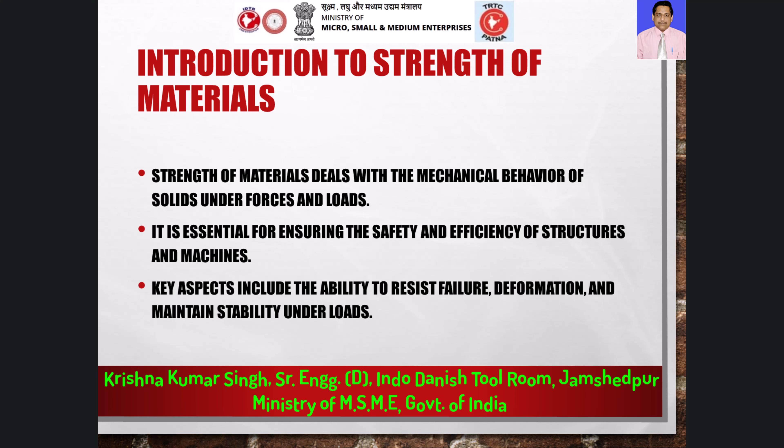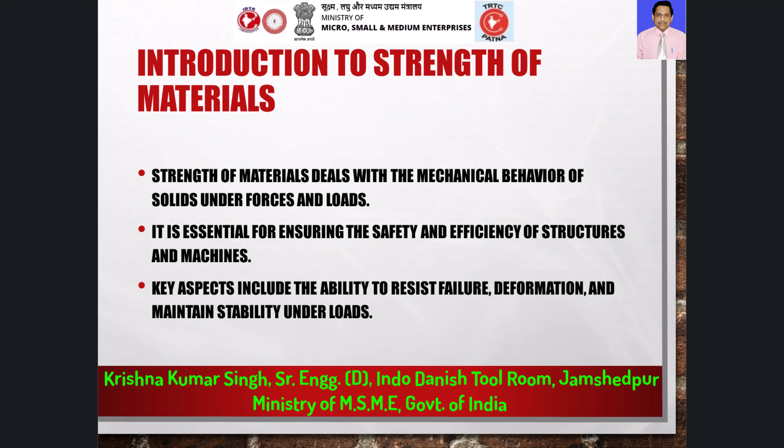Now, when we talk about strength of materials, we are referring to a branch of applied mechanics that specifically focuses on the mechanical behavior of deformable solids under external loads. This includes various structural components such as beams, columns, plates, and shafts, key elements in everything from buildings to bridges and machines. In engineering, understanding how these materials behave under different conditions is essential to ensuring the safety and longevity of our designs. Key concepts and requirements.

1. Strength. The most basic requirement of any structural component is strength. This means that each and every component must be able to resist the forces it is subjected to during service. In simple terms, the material should not fail or break under normal working conditions. Whether you're designing a beam for a bridge or a shaft for a machine, ensuring adequate strength is fundamental.

2. Stiffness. Now, strength alone is not enough. The material must also possess adequate stiffness. Stiffness refers to the ability of a material to resist deformation, essentially how much it changes shape or size under a load. For example, if two components are meant to fit together perfectly, any excessive deformation could lead to a mismatch, causing functional problems. Interestingly, a material can be strong but not necessarily stiff. This is why both properties must be considered during design.

3. Toughness. Next, some materials must withstand dynamic loads, forces that change rapidly or come in short bursts. For these situations, materials must have toughness, or the ability to absorb energy without damage. Toughness is essentially a balance between strength and ductility, particularly under dynamic or impact loads.

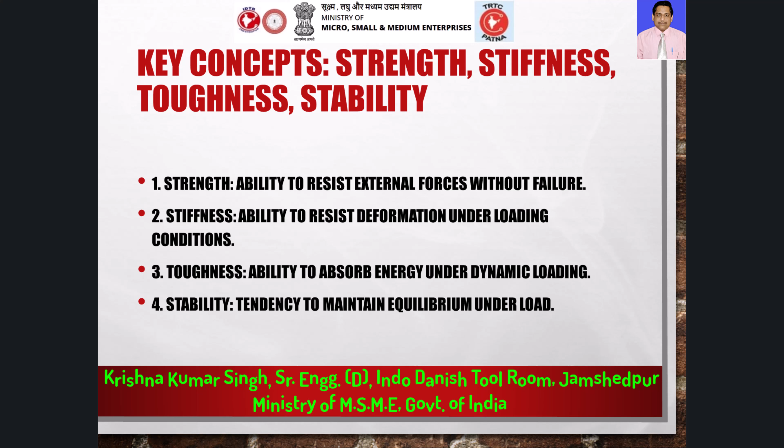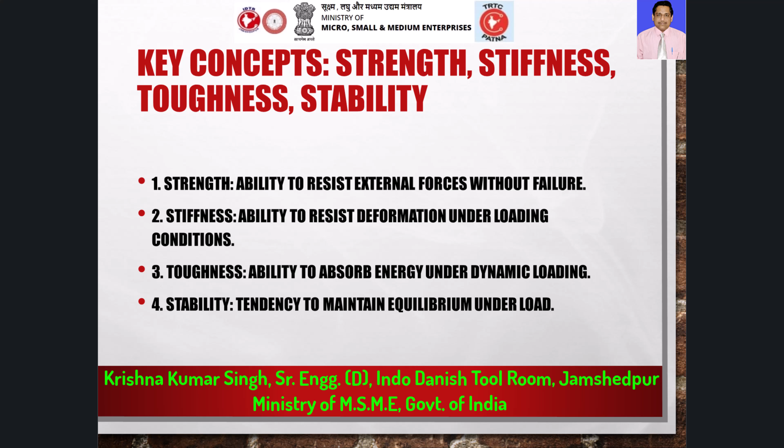4. Stability. Finally, we come to stability. Stability refers to a material or structure's ability to maintain its shape and equilibrium under load. Lack of stability can lead to sudden, catastrophic failure. For example, imagine a long column under compressive force. If it lacks stability, it may buckle and collapse even if the material is strong and stiff. Ensuring stability is key to avoiding these kinds of failures.

Generalized procedure for analyzing strength of materials. In mechanics of solids, analyzing a system typically follows a structured approach. Let's break this down. Step 1: Setting up an idealized model.

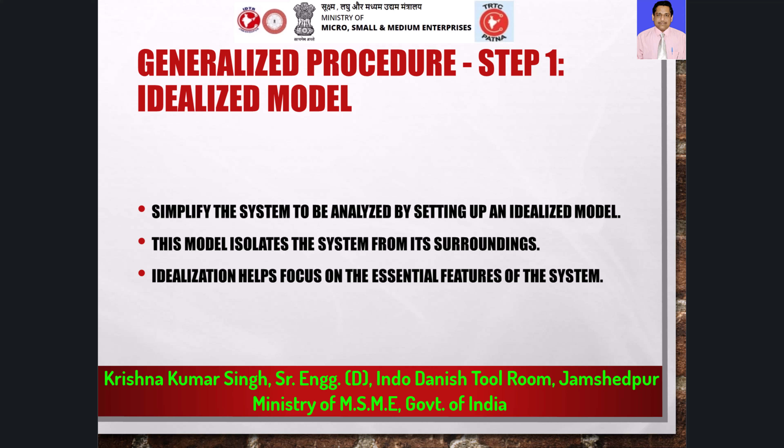First, we begin by simplifying the system of interest. The real-world object, a machine, a beam, or any structural component, is isolated from its surroundings, and we create an idealized version of it. This simplification helps make the system easier to analyze while still capturing the essential physical behaviors. For example, instead of analyzing every microscopic detail, we might approximate the system using basic geometric shapes like rods or plates.

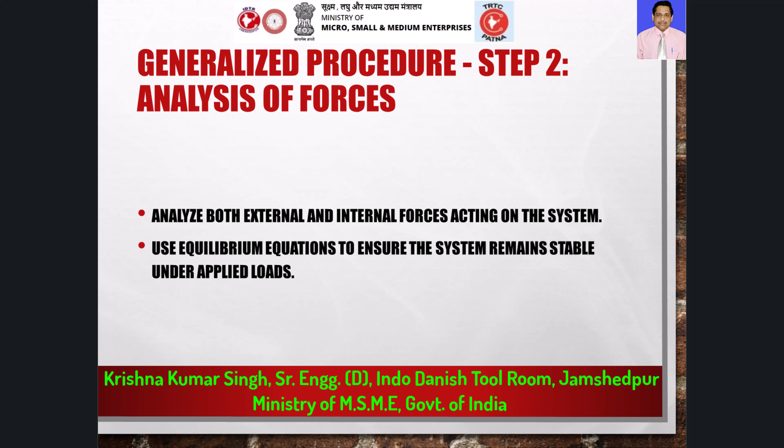Step 2: Analysis of forces. Next, we analyze the forces acting on the system. These could be external forces, such as gravity, wind, or loads applied to the structure, or internal forces, which resist these external forces. It's essential to understand how the forces are distributed throughout the system, and we apply equilibrium equations to ensure that the system remains stable under the applied loads.

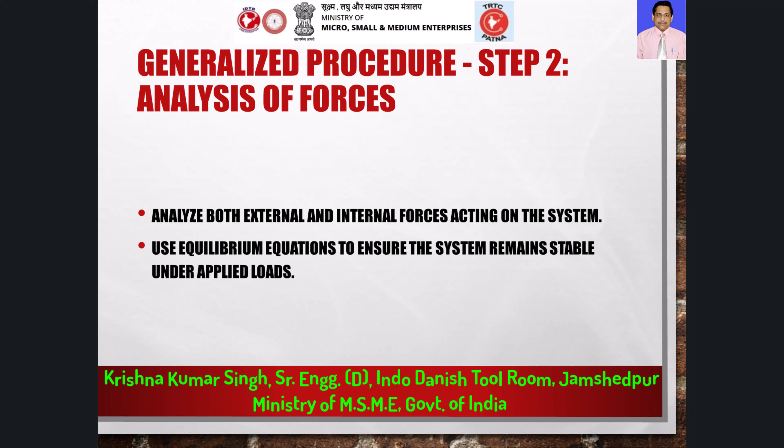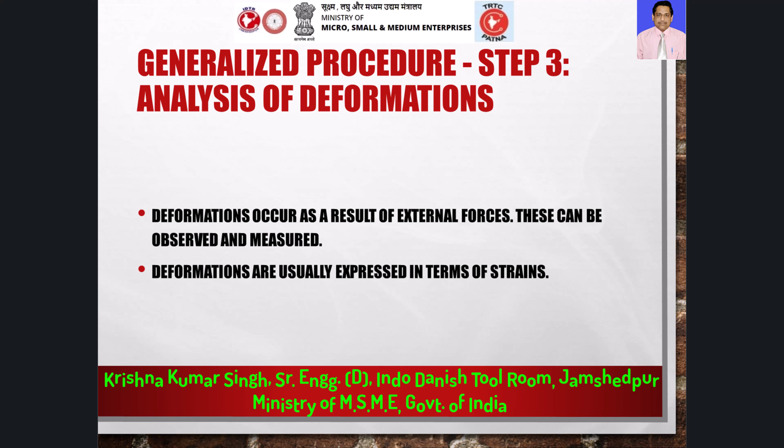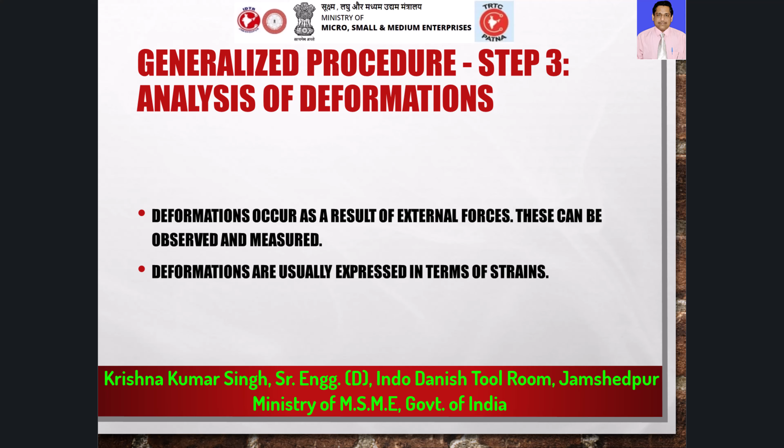Step 3: Analysis of deformations. Now let's talk about deformations. Deformation occurs when external forces cause a material to change shape or size. This can be measured and observed, and it's often expressed in terms of strain, a measure of how much the material has deformed relative to its original shape. In most cases, we'll focus on elastic deformation, which means that the material returns to its original shape once the load is removed.

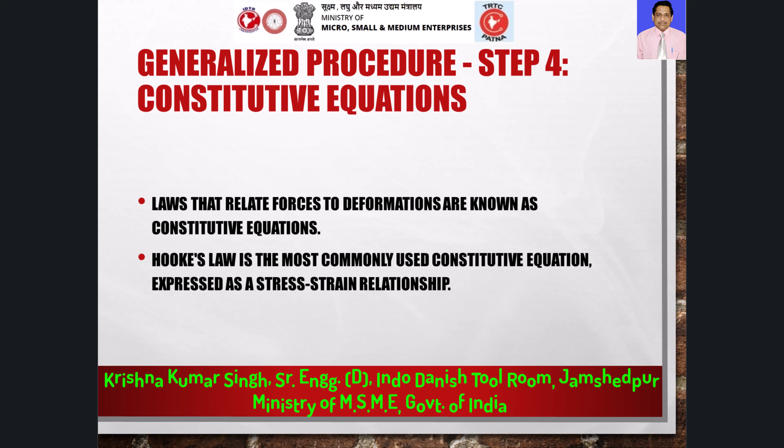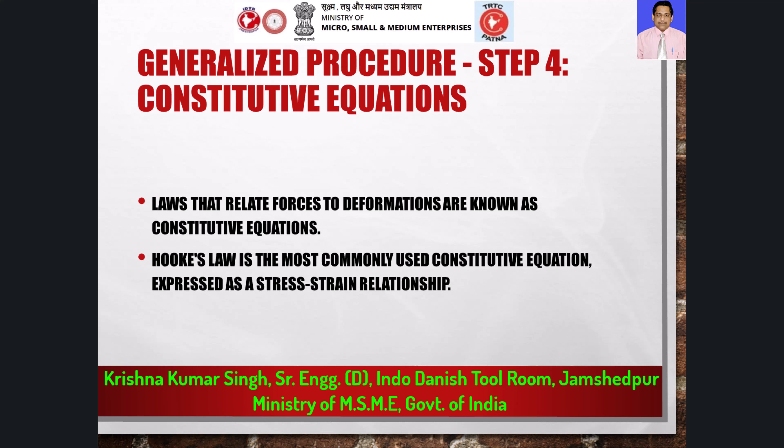Step 4: Application of laws. Lastly, we apply the laws that relate forces to deformations. These are known as constitutive equations. The most commonly used law in this context is Hooke's law, which describes the linear relationship between stress and strain in elastic materials. This law, along with other stress-strain relationships, helps us predict how materials will behave under different loading conditions.

Part 4: Practical Applications and Conclusion. Understanding the strength of materials is crucial for solving real-world engineering problems. Whether you're designing a skyscraper, a vehicle, or a simple tool, these principles are your guide to ensuring safety, durability, and efficiency. By applying the concepts of strength, stiffness, toughness, and stability, engineers can design structures and machines that perform reliably under various conditions. The idealized models, force analysis, deformation analysis, and constitutive equations we've discussed provide a practical framework for approaching a wide range of engineering challenges.

As we wrap up this lecture, I encourage you to think about how these principles apply to the structures and machines around you. Whether it's a bridge, a crane, or even the chair you're sitting on, these concepts are at work, ensuring that everything functions as expected.

Thank you for joining me in today's lecture on the Introduction to Strength of Materials. I hope this session has given you a clear understanding of the fundamental concepts and how they relate to real-life engineering challenges. Be sure to explore further into each of these topics as they form the foundation for more advanced study in structural analysis, material science, and mechanical design.

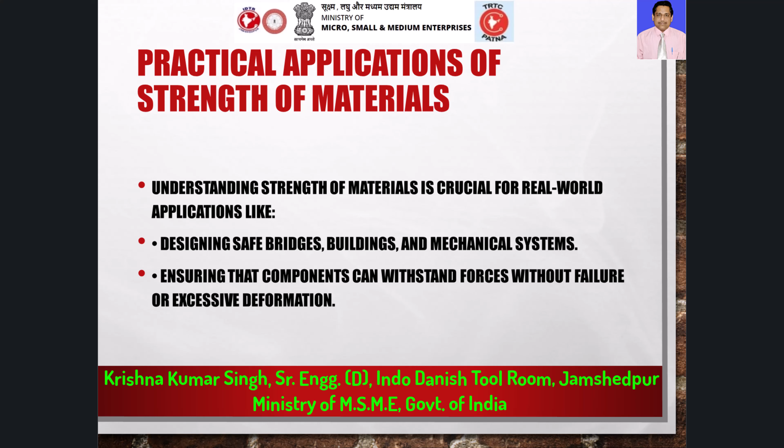Basic Assumptions in Strength of Materials.

Hello, students. Welcome to today's lecture on strength of materials. I'm excited to dive into a fundamental part of the subject that lays the groundwork for more complex discussions: the basic assumptions in strength of materials. These assumptions simplify real-world phenomena and allow us to apply mathematical models for structural analysis. They serve as the foundation upon which we build all our calculations and designs. So let's get started by understanding these key assumptions.

Assumption 1, continuity of materials. The first assumption we make is that all materials are continuous. What does this mean? Under this assumption, we treat materials as if they are continuously distributed throughout the space they occupy. This idea is called the continuum hypothesis, where we assume the material has no voids, cracks, or gaps. Essentially, we treat the material as a smooth, unbroken substance that completely fills its volume. Diagram showing a steel bar and microscopic view of atoms.

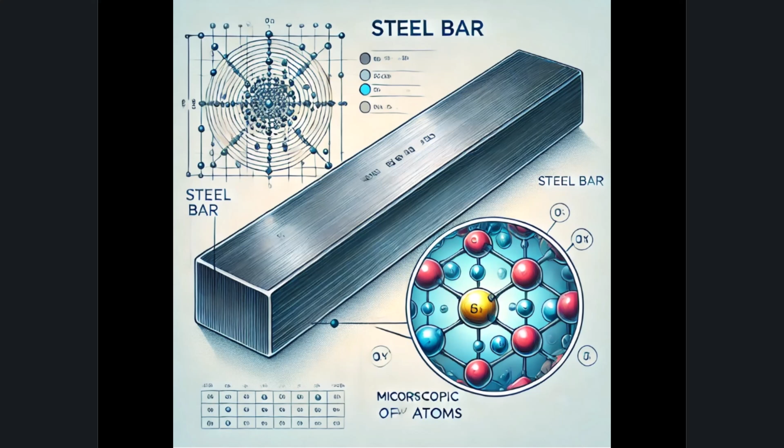Take, for example, a steel bar. In reality, the bar is composed of billions of atoms, but for engineering purposes, we assume it behaves as one continuous block of steel. This allows us to use mathematical tools like calculus to analyze the bar's behavior under different conditions. We describe changes in variables like displacement, stress, or strain as continuous functions of position.

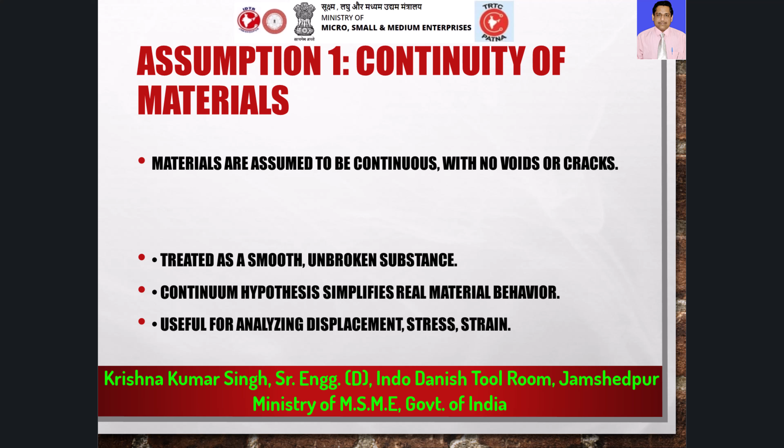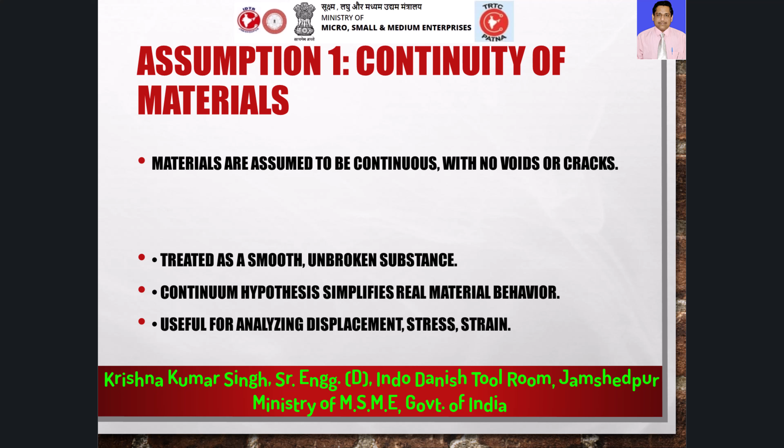Now, we know that real materials are not perfectly continuous. They have microscopic defects, but the assumption still holds for most engineering applications. Whether we're working with steel, wood, or concrete, treating the material as continuous gives us accurate enough results.

Assumption 2, homogeneity of materials. The second assumption is that materials are homogeneous. In simple terms, this means that the material has identical properties at every point. No matter where you take a sample from, it will behave the same way. This assumption simplifies our analysis, as we don't need to study every small section of the material separately.

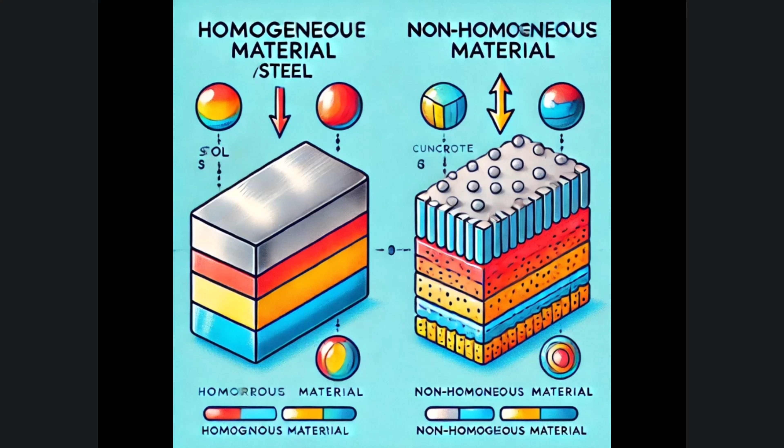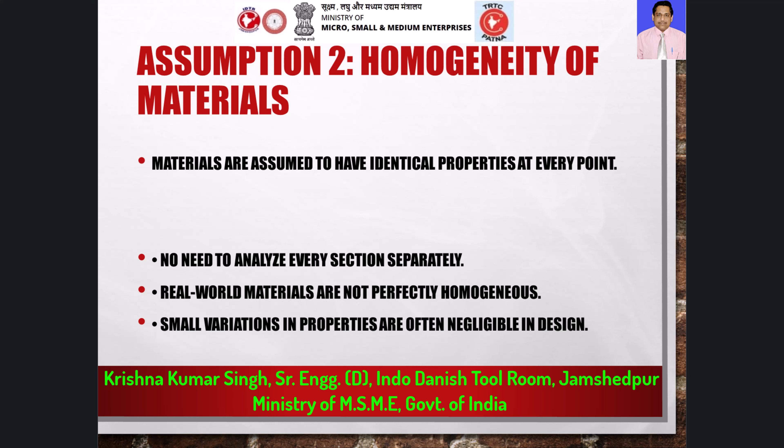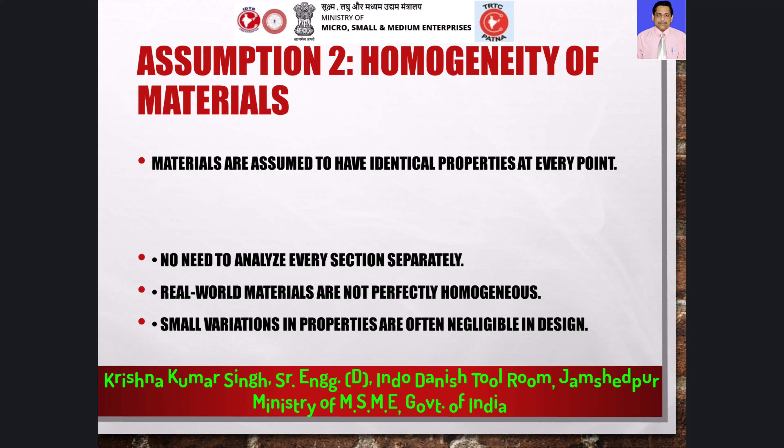Example of a homogeneous material, e.g. steel versus non-homogeneous like concrete. In reality, most materials are not perfectly homogeneous. For instance, metals like steel can have small variations in composition, and materials like concrete or wood are obviously non-homogeneous. But for engineering purposes, the variations are often small enough that they don't affect the material's overall behavior. So the assumption of homogeneity allows us to simplify our calculations while still obtaining accurate predictions.

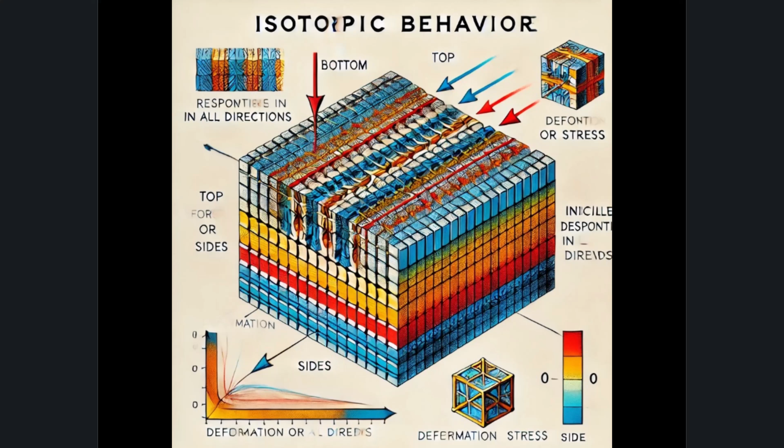Isotropy of materials. Next, we have the assumption of isotropy. A material is said to be isotropic if its properties, like strength or stiffness, are the same in all directions. This means that no matter which way we apply a force, the material will respond in the same manner. Diagram showing isotropic behavior of materials under different loads. Metals like steel and aluminum exhibit nearly isotropic behavior on a macroscopic scale, making this assumption quite useful in many engineering designs. However, on a microscopic level, some materials may behave differently.

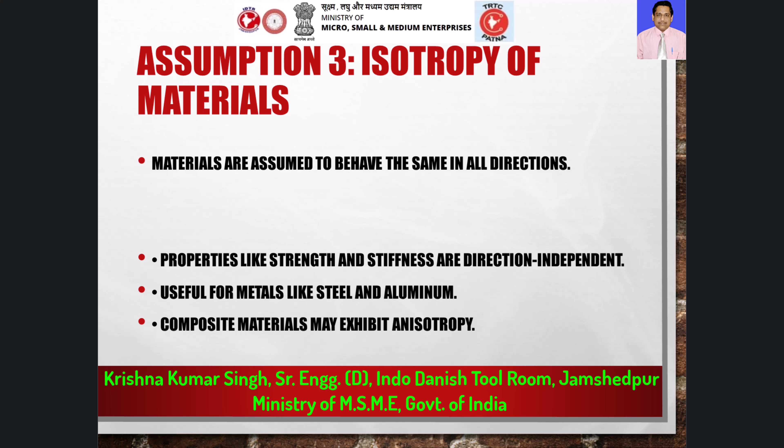For example, single crystals of metals are anisotropic, but because we work with large quantities of randomly oriented crystals in real-world applications, the material averages out to behave isotropically. Keep in mind, though, that some materials, such as composites like carbon fiber, are anisotropic, meaning their strength depends on the load direction. But for most structural engineering applications, isotropy is a valid assumption.

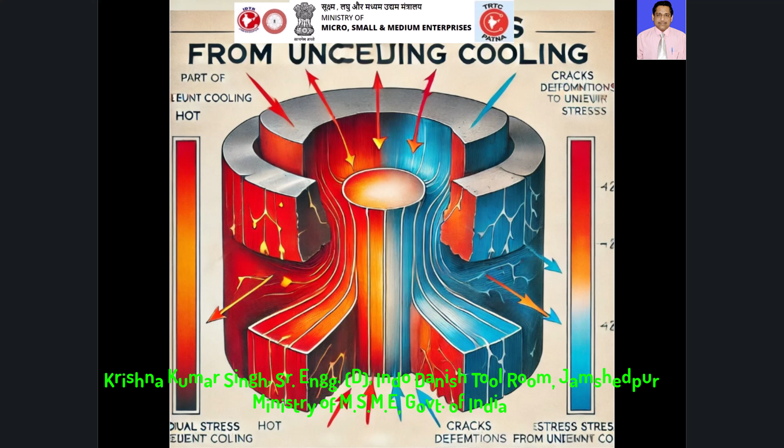Assumption 4, absence of internal forces before loading. Finally, we assume that materials are free from internal forces before loading. In other words, we start with the material in a stable state with no internal stresses or forces unless an external load is applied. See examples of residual stress due to uneven cooling in metals or drying in timber.

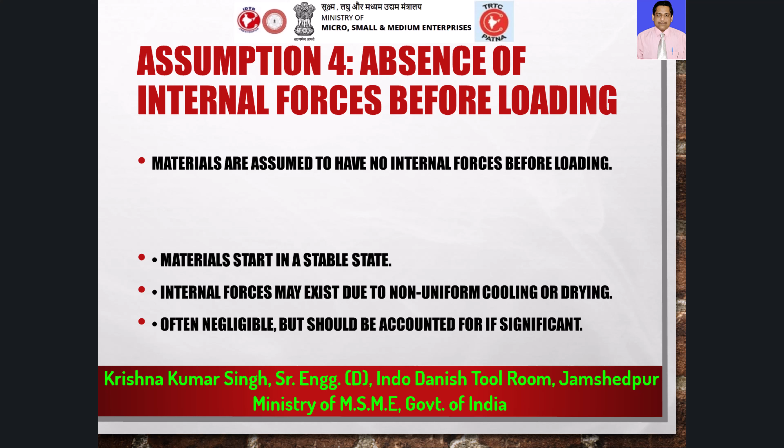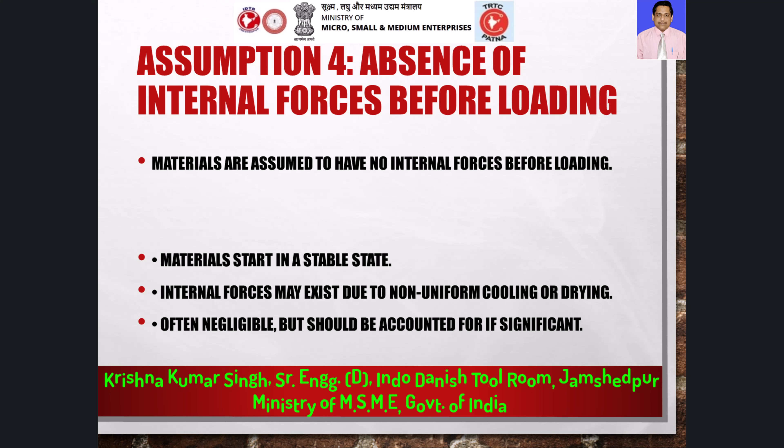However, in real life, some materials can have internal forces even before loading. For example, metals that cool unevenly after casting or welding can develop internal residual stresses. Similarly, timber may have internal stresses as it dries. In most cases, these forces are small enough that we can safely ignore them, but when they are significant, we need to account for them to ensure accurate analysis.

In summary, we've covered 4 key assumptions that form the basis of our analysis in strength of materials. 1. Continuity: we assume materials are continuous with no voids or cracks. 2. Homogeneity: we assume materials have identical properties at every point. 3. Isotropy: we assume materials behave the same way in all directions. 4. Absence of internal forces before loading: we assume materials are free from internal forces until an external load is applied.

These assumptions help us simplify the complex behavior of real materials into something we can analyze mathematically and practically. They allow us to create models that, while idealized, give us accurate enough results for engineering design.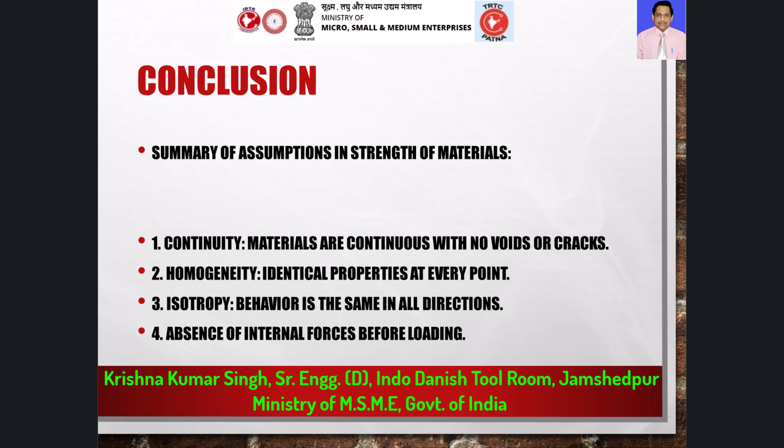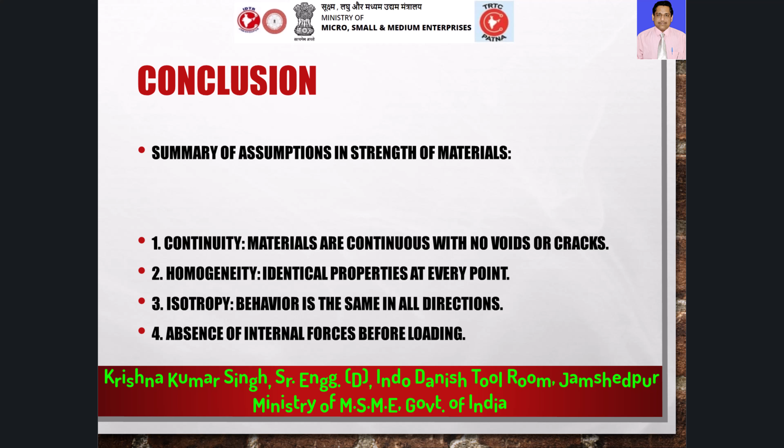Remember, while these assumptions are powerful, they are simplifications. As you move forward in your studies, you'll learn when and where these assumptions hold true and how to deal with situations where they don't. Thank you for your attention today, and I look forward to our next discussion.